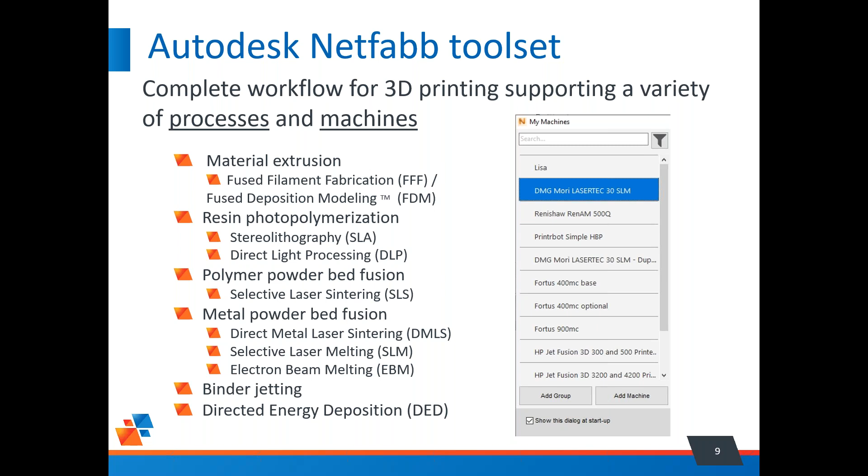Currently, the Netfabb solution is comprised of Standard, Premium, and Ultimate products, one building on top of the other's functionality. On top of that, we have a set of utilities that will help with the process. For example, optimization utility, advanced toolpath utility, lattice topology, as well as a Netfabb simulation utility. And we'll talk about this a little bit later.

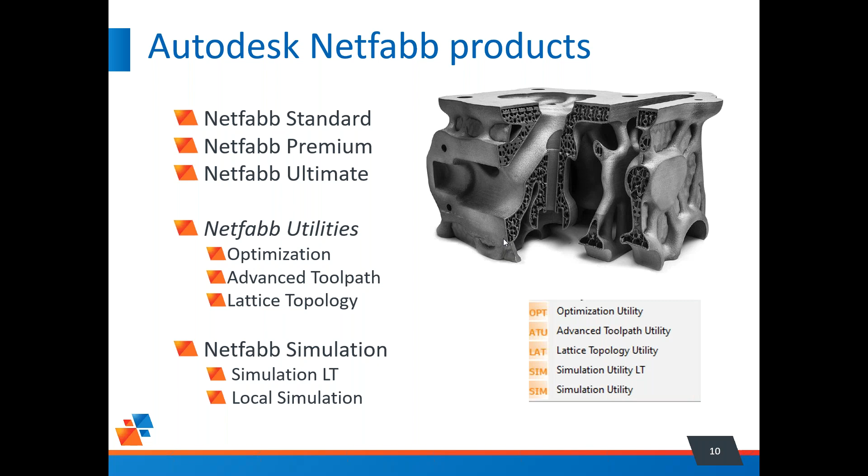So let's take a look at each of these products. Netfabb Standard covers all the important aspects of creating a model, from bringing the geometry in as mesh, 3D CAD or slice files, having the ability to export the mesh back to CAD as BREP, boundary representation type solid,

model editing, for example, part hollowing, tools for mesh manipulation, applying labels, textures, colors, having the ability to cut, split, or shell the model. Slice Commander with toolpath simulation and being able to create hatching patterns and offsets.

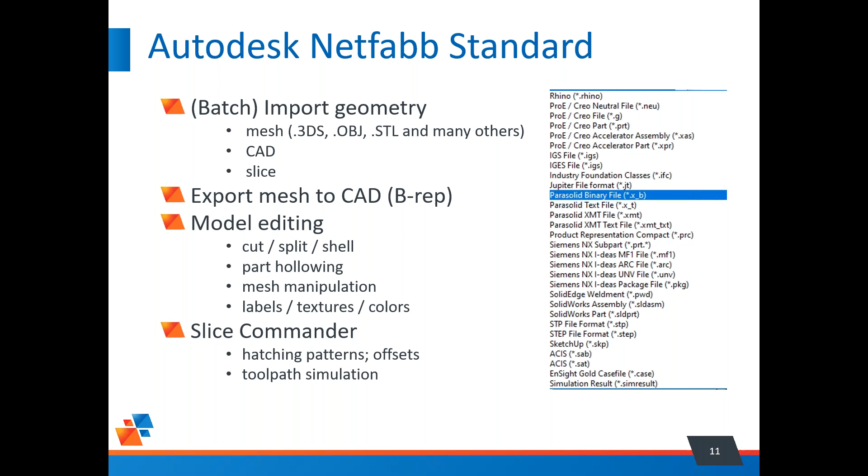Let's take a look at some videos here, courtesy of Kevin Morsfield, technical sales specialist from Autodesk. And first we'll look at mesh to BREP export. So this is the interface of Netfabb. We're bringing in a mesh solid as a 3MF file on a generic platform. We have the ability to orient the model here, and we're going to apply some mesh modifications.

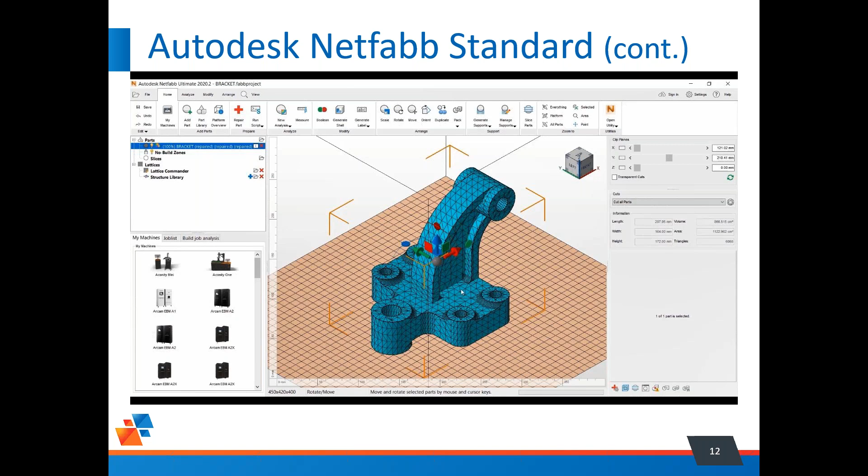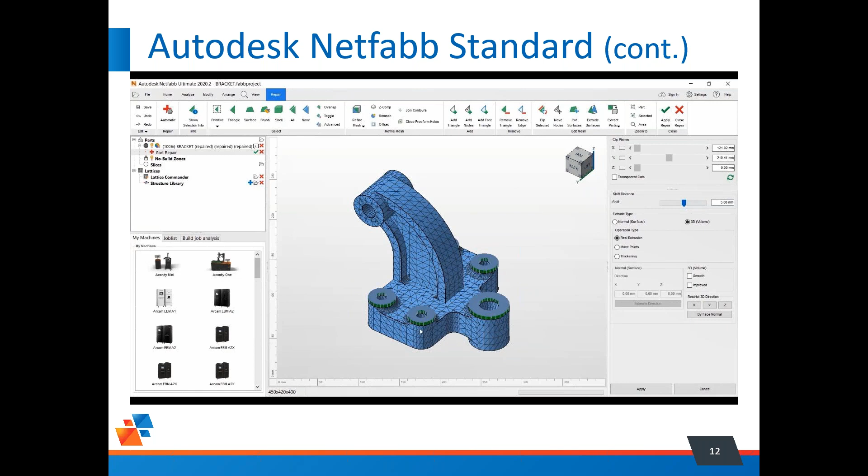For example, we're going to extrude some of these bosses. We're going to look at the repair part first, see if there's any need to fix the model, and we will extrude the selected surfaces at, say, a value of 5 millimeters. The preview is going to show us how the result is going to be. And in the next step, let's delete some of these faces.

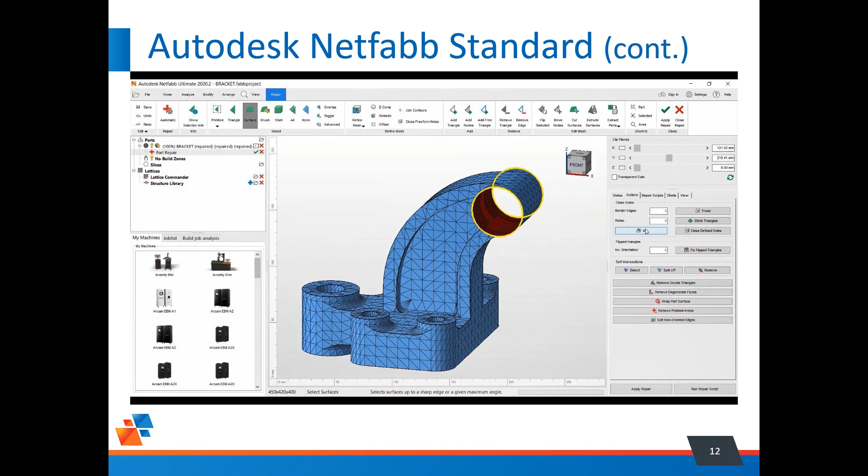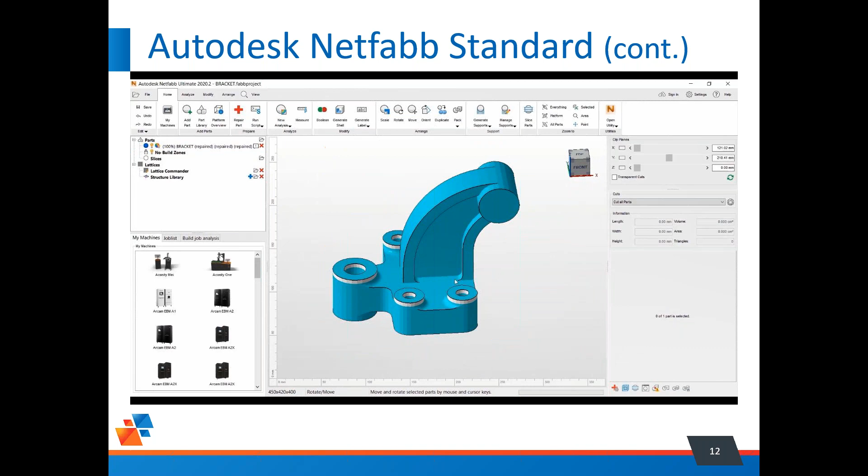We're in a repair environment now. Different options there. Also the ability to cap the mesh model. And the modification could be kept as a separate part, or applied, I mean, remove the original part, or keeping the original as well. And the next step is going to be to export this to solid.

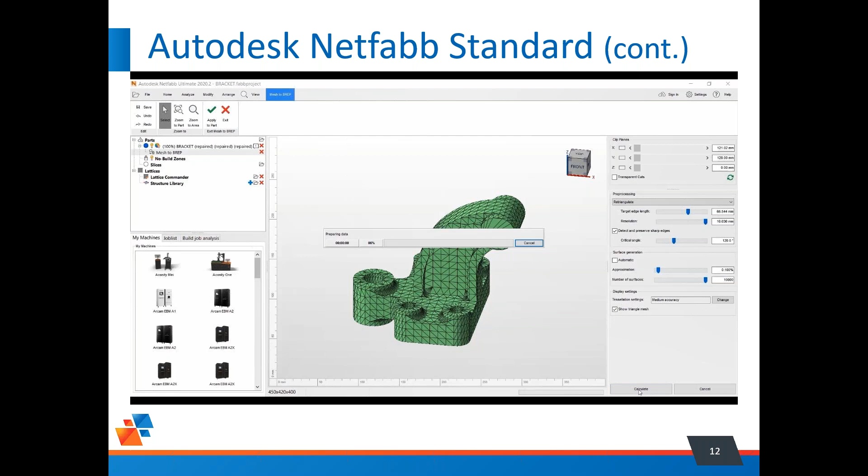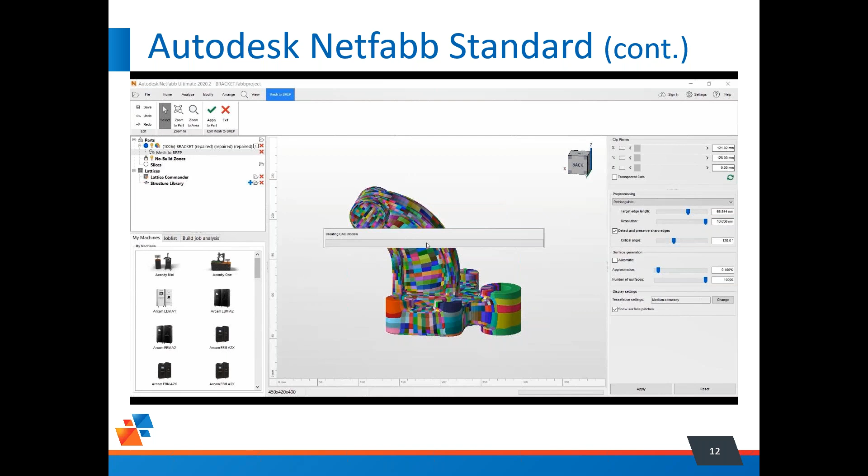That needs to happen after a check on the surface health, looking for normal reversals, or any kind of missing geometry. So we need to make sure that this is a watertight solid. The export could happen maintaining the sharp corners of the part, or applying rounds, especially for components that are a result of a generative design process. And this is the final result. So a model that has been exported, that could be exported to STEP, SAT, or IGS.

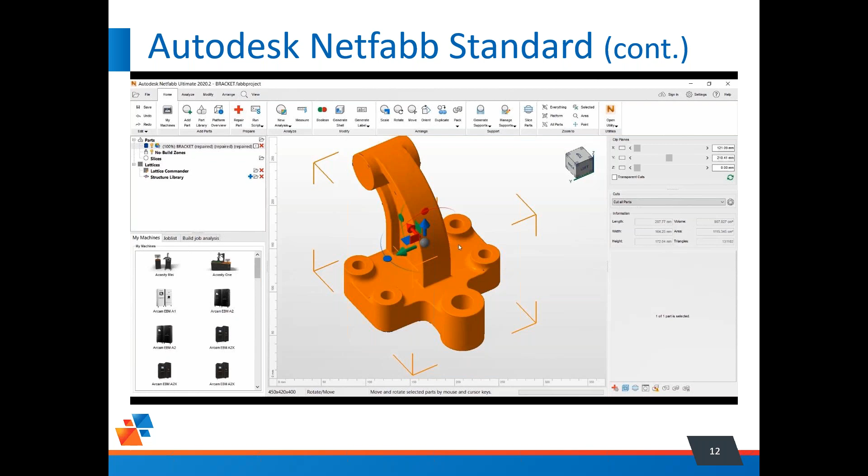Some other functionality in Netfabb Standard: the ability to fix meshes, look for missing triangles, overlapped geometry, by applying some scripts for automatic meshing, a semi-automatic process, or a fully manual process by replacing triangles.

Netfabb Standard also allows a basic 3D packing, like a 3D nesting algorithm, which will take care of collision avoidance, planar packing, ability to move, rotate, or align the parts, orientation analysis. In terms of machine workspaces, it does not support metal type machines, so it's FFF and not metal. Also, the ability to create fused filament type supports at the toolpath level, so inside the G code.

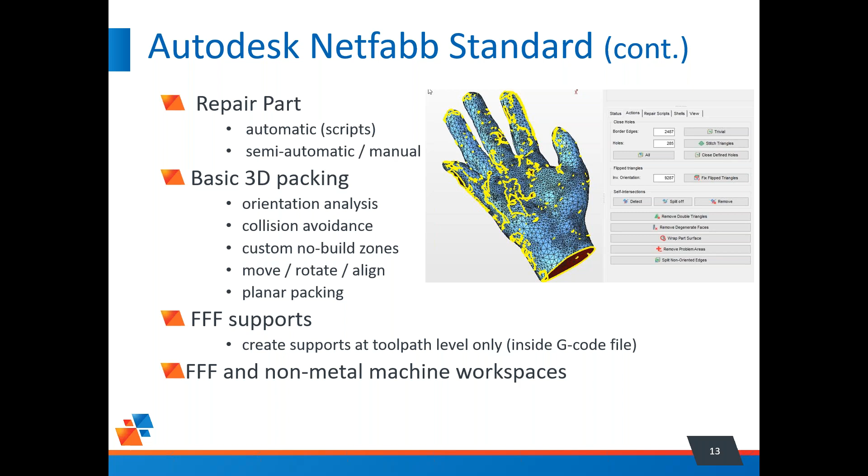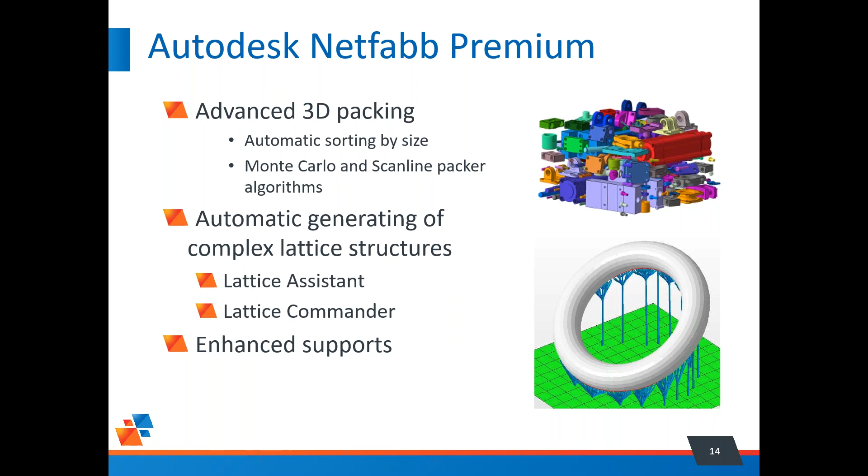The next level, Netfabb Premium, expands on the capabilities of Netfabb Standard, and allows for advanced 3D packing, automatic sorting by size using a couple of highly optimized 3D packing algorithms, Monte Carlo and Scanline. Also, it supports automatic generation of complex lattice structures, and to that extent has a couple of utilities very useful, as well as the ability to create a variety of supports.

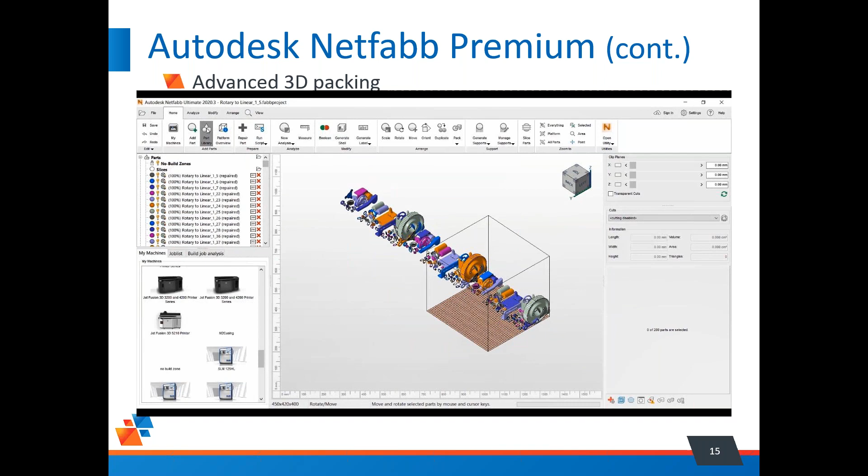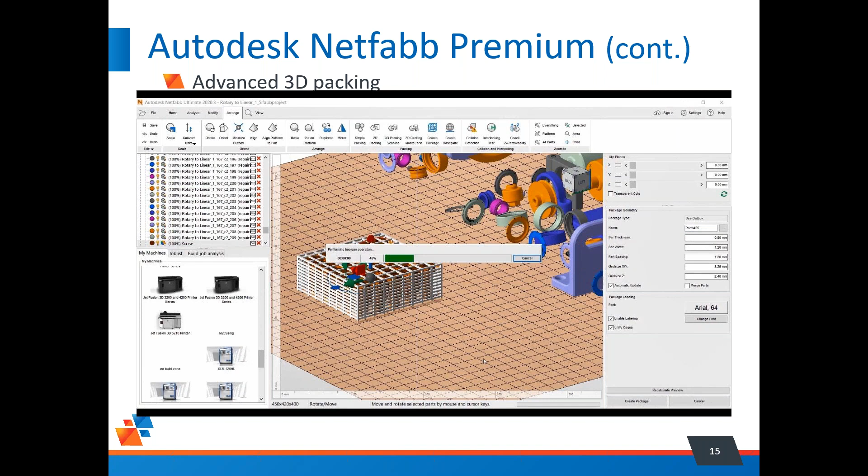Let's take a look at another example here. So you see here in this example on a generic platform, a set of parts of various sizes. We're going to bring in another one, small component, and we want to make sure that all these copies, let's say 25 of them, are not going to be lost in the packing algorithm, thrown in the volume. So we're going to make sure they're kept together. So we're building a package around them, and that allows us to keep these components organized together under that pack.

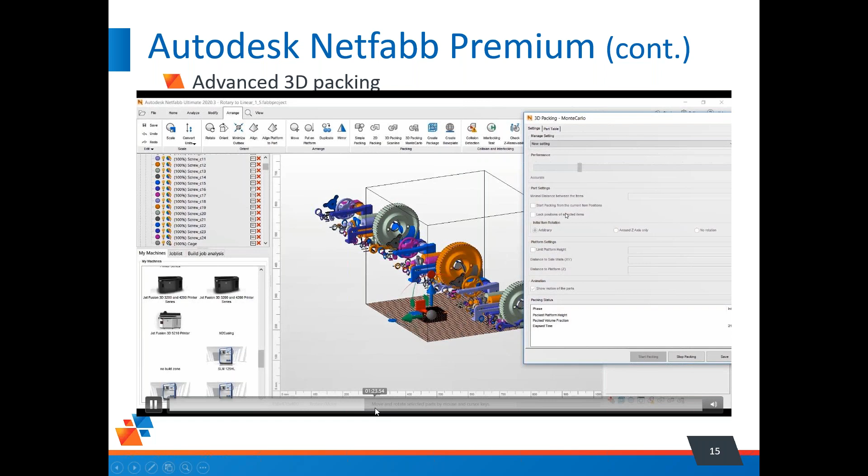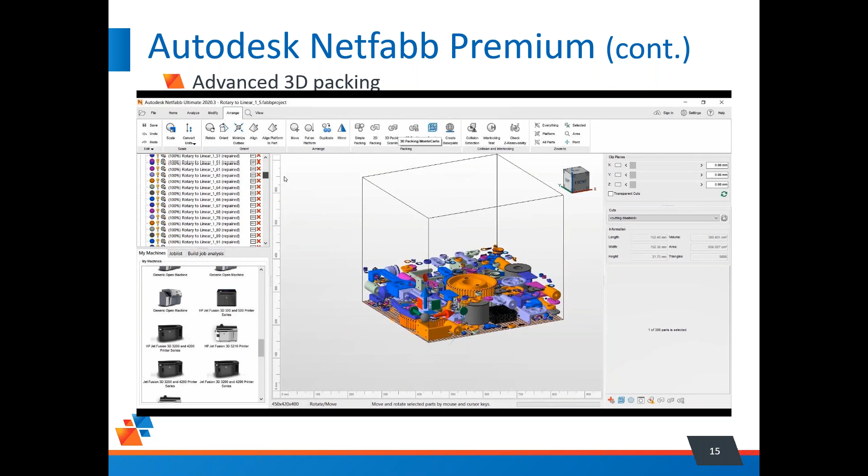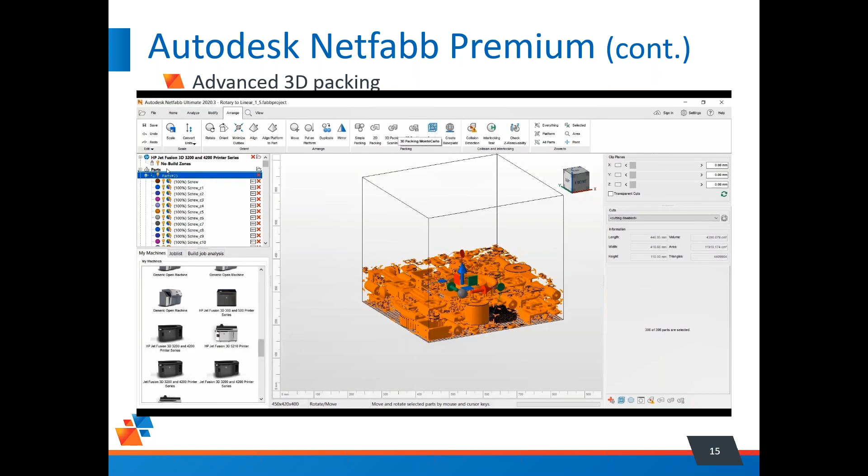The 3D packing Monte Carlo algorithm will, as you'll see in a bit, take care of organization of these to optimize the space. Next step, we're going to take this and place them in a specific machine bed. So I'm going to use, let's say, a HP Jet Fusion 3D printer, and we're going to add these components now to the build zone. And again, make sure that these components are kept together by grouping them.

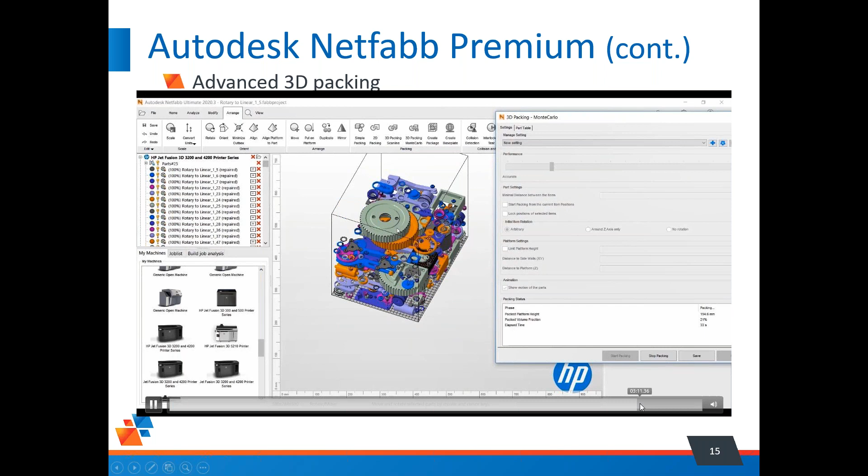And as you will see, after we start the packing process, these components are going to stay under the defined package. There's no interference between components. There's no collision. They are arranged to optimize the volume.

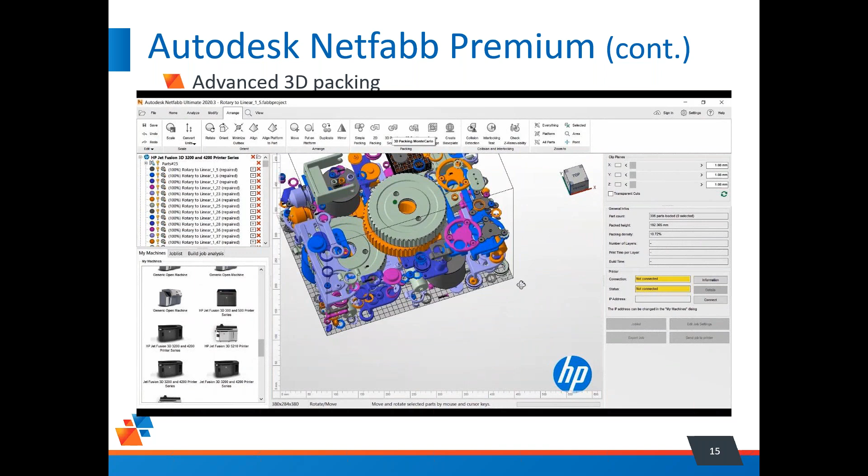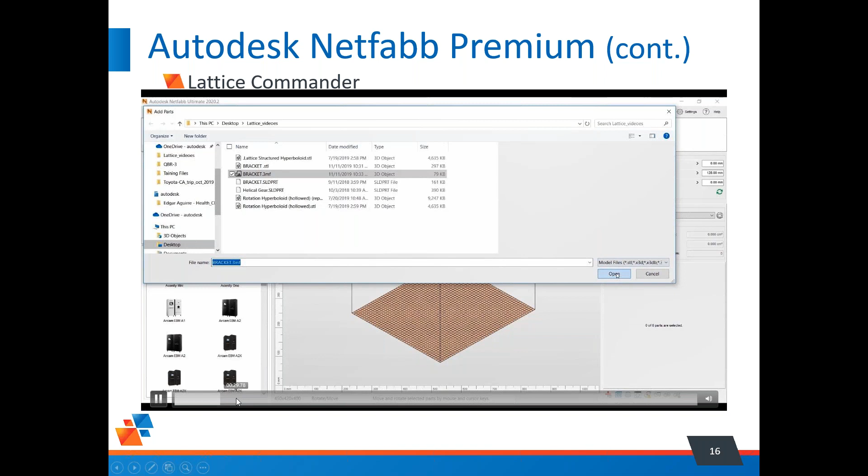Okay. Here's an example of Lattice Commander. So with Lattice Commander, we're again bringing a mesh file in from a large number of formats, and the intention here is to lighten up the part. So we're going to remove some of the geometry, some of the faces, and replace those with an automatically generated lattice. So we've dragged the component into the Lattice Commander here, and we're going to shell this and then remove some of the faces.

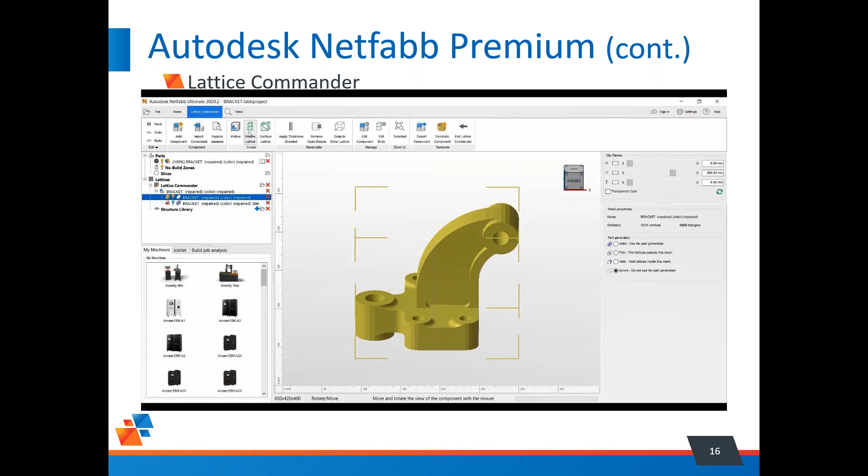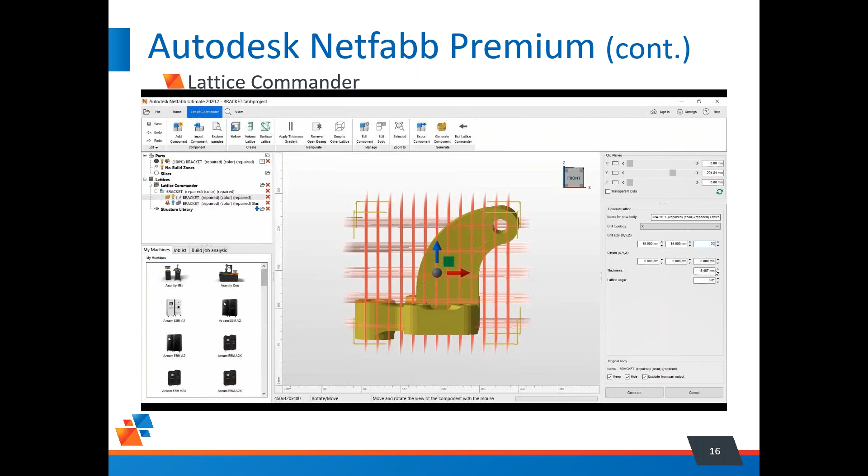Here's a volume lattice command, so we're going to apply an X type topology for this, and these parameters are used to define the lattice size, the three directions, as well as the thickness of the elements. So this lattice is basically matching currently the volume of the part that we started with, and it's a separate component. And the next step is going to be to vary some of these thicknesses.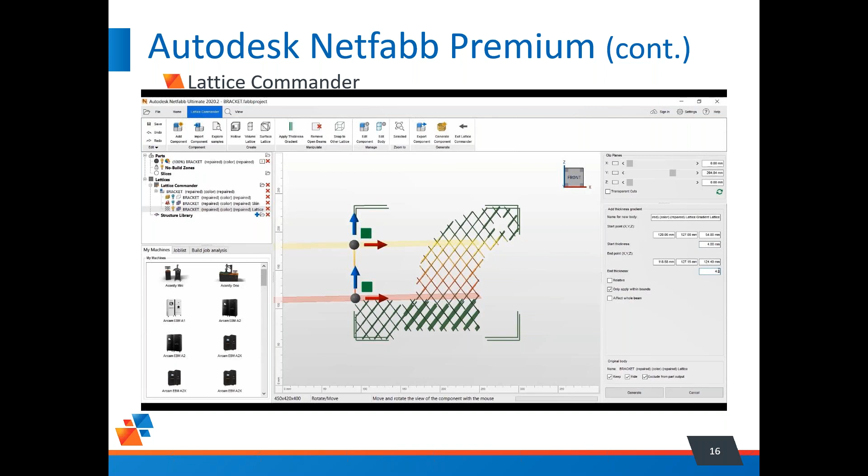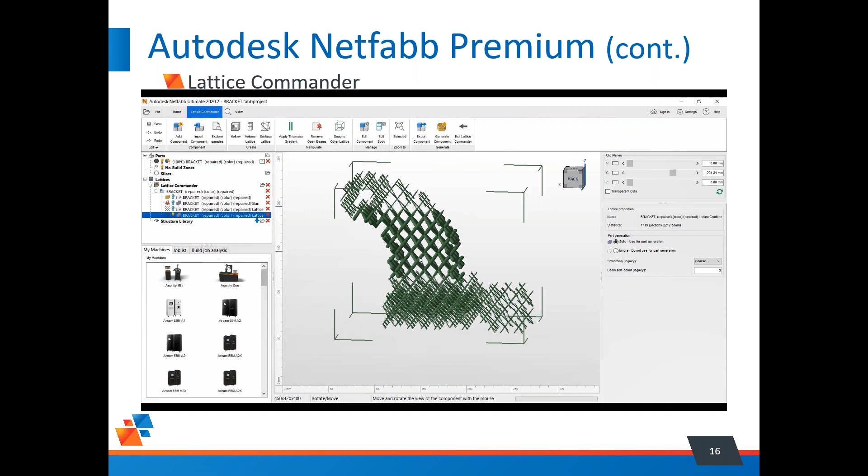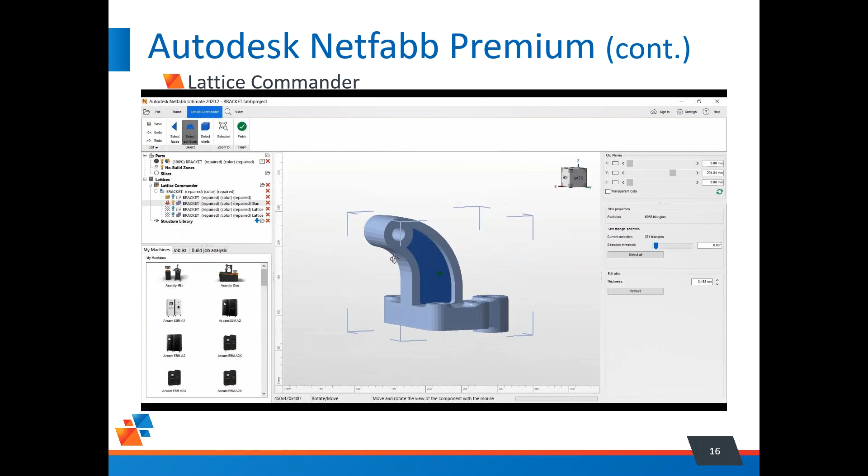So we have the ability of controlling areas where the lattices have a different thickness than the general one. So start thickness and an end thickness, in this case, equal. You can see in between the two defined planes, the model now has a thicker thickness than the 1 millimeter we started with. Now, the next step, we're going to apply an operation that will allow us to basically merge all these together. So removing some of the faces first, thickening some of the remaining faces.

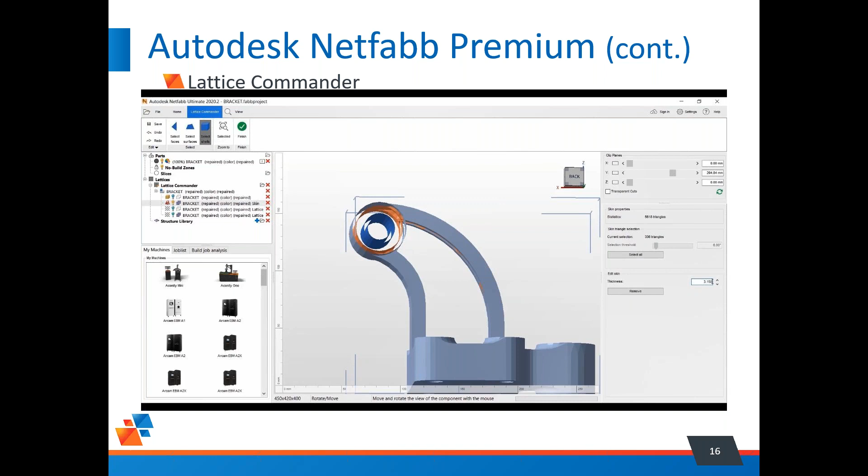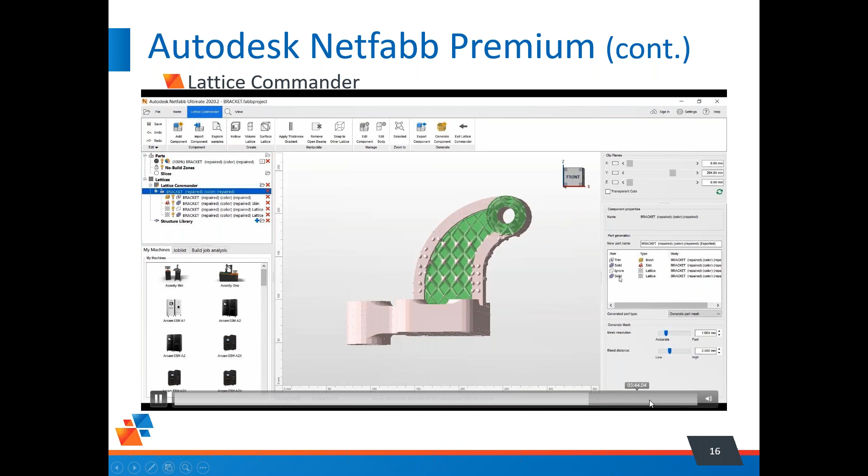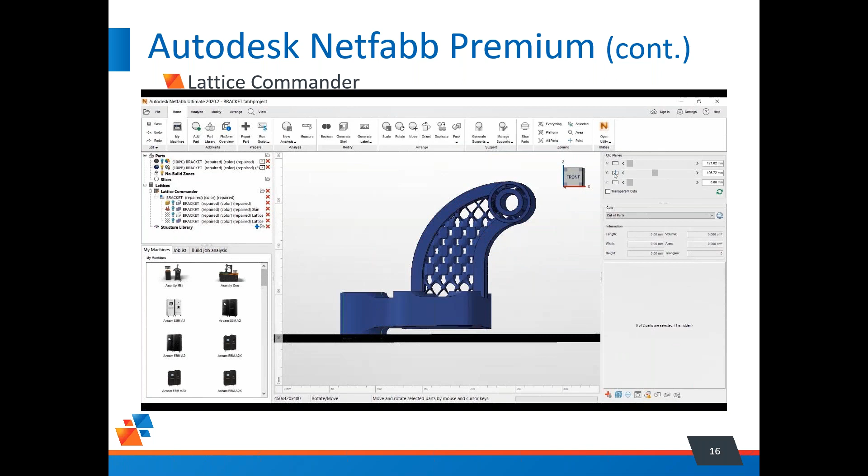The intention here is to apply modifications to the solid that will ensure a certain mass reduction and strength as well. So the result now is going to be basically a Boolean operation between multiple components that will allow us to obtain the final part. And here it is. Some slice planes will show us the geometry change and different lattice thicknesses, different wall thicknesses as well.

Lastly, Netfabb Ultimate, again building on top of Netfabb Premium functionality. There are some extra features there in Lattice Assistant: editable cell size, variable scale for cell size scaling, lattice optimization to withstand prescribed static loads, as well as the selective space structures, 3S. This will allow us to customize lattice patterns and unit cell topologies.

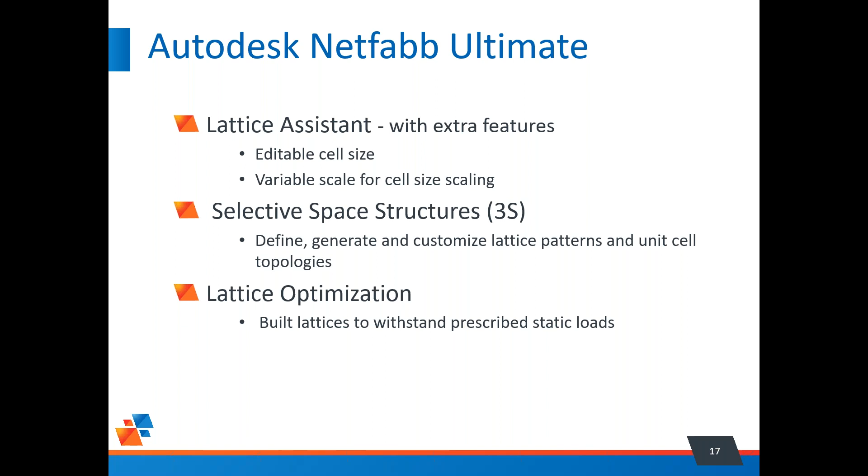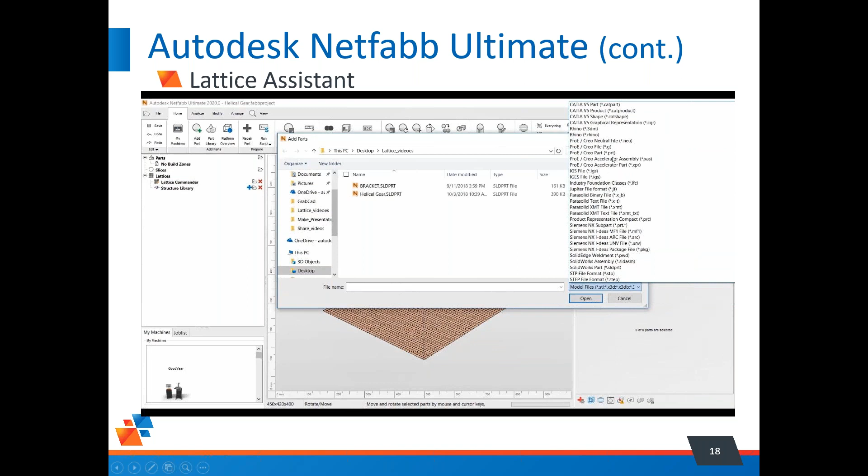Okay, here's the Lattice Assistant. We're again adding a component. This time it's a native SolidWorks file, and the intention here is to reduce the material that we're going to use to build the part by hollowing the interior, replacing the solid interior with a lattice structure. Okay, so this component is a solid component at this point.

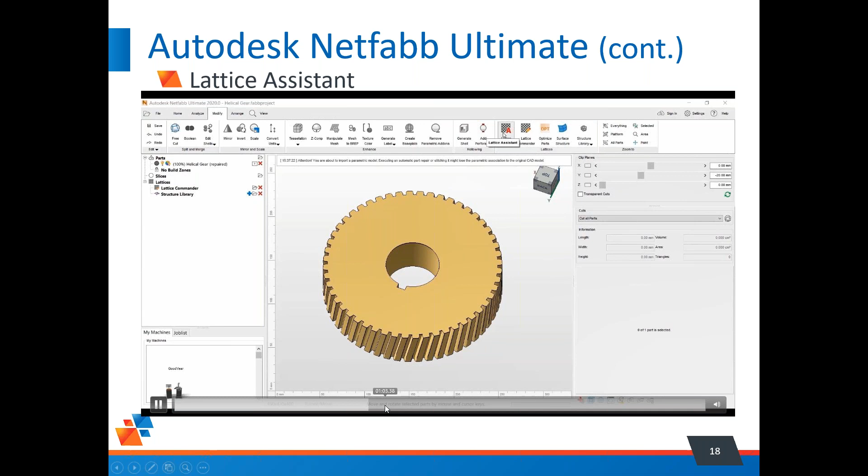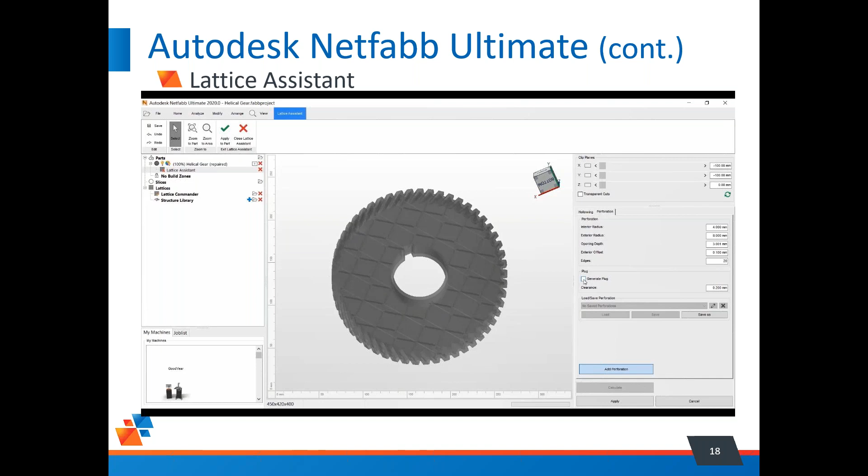And the type of lattice structures available, you can select them from a long list. Also, the thickness can be defined here and the cell size, again, in 3 different directions. And let's see what the result is going to look like after post-processing. We're going to apply some holes to be able to remove the powder.

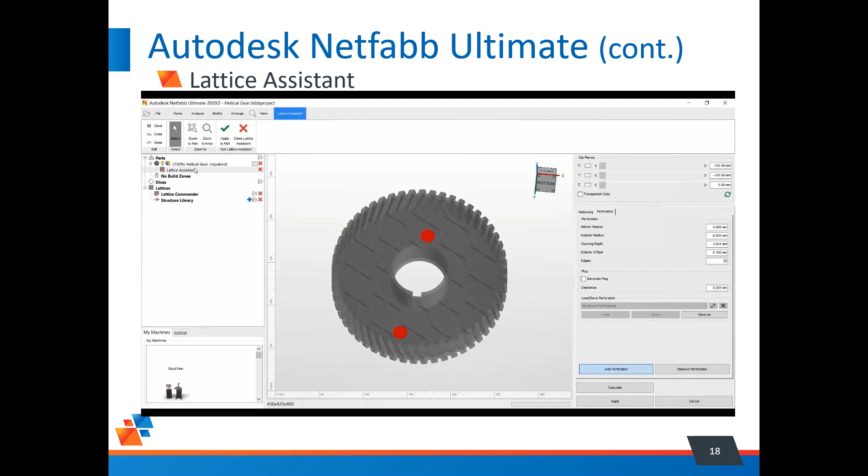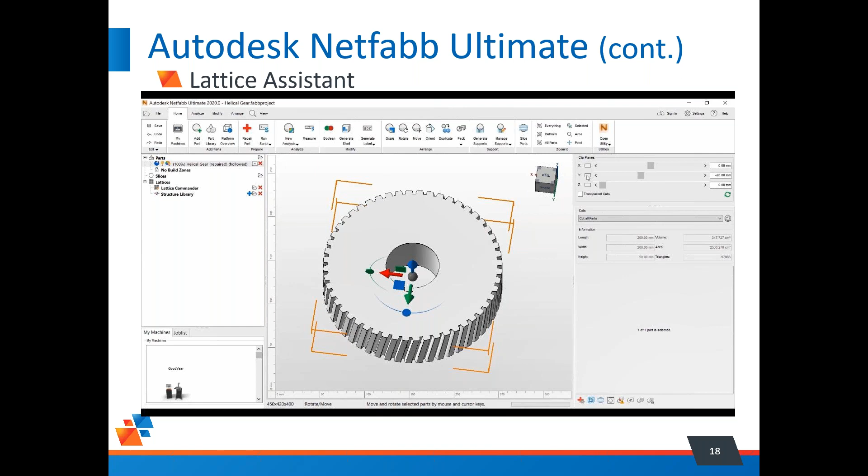The software also has the ability to create plugs as separate components in case you want to actually plug back the solid and glue it back together. You can see the holes being automatically applied there. And a cross-section through the model shows the lattice structure that was generated. Okay.

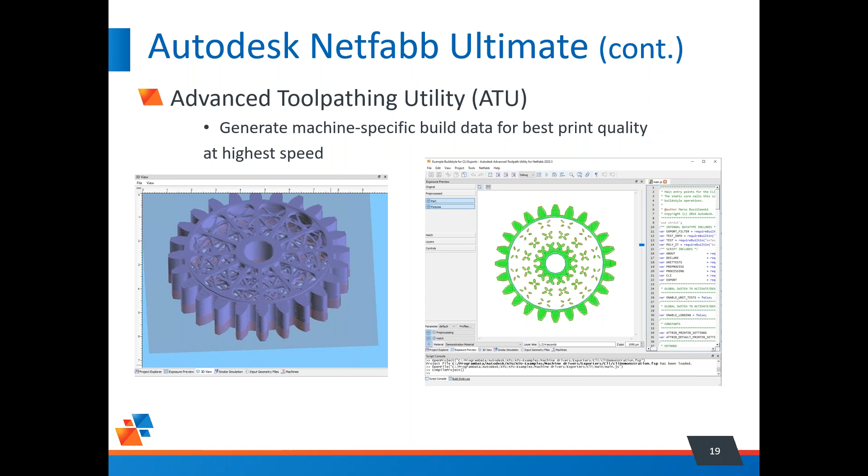Also part of Netfabb Ultimate, there's an advanced toolpathing utility which allows the tool to connect directly with the machines and create machine-specific build files to ensure that the quality of the print is the best possible, and the print is happening at the highest speed. So that's all based on machine properties in, let's say, a post-processor specific to the machine.

Some other capabilities also: scripting with the Lua scripting language to automate common preparation tasks, as well as Netfabb application server. So this will allow us to install Netfabb on multiple computers on a network headless, so without an interface, again, to speed up the processes.

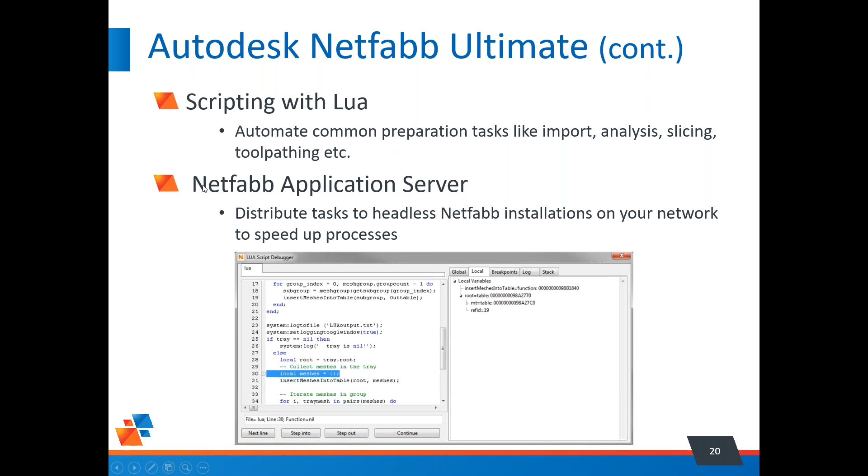Lastly, let's talk a little bit about Netfabb Simulation. So these builds, especially on the metal side, are particularly expensive. So the intention here is to make sure that we avoid build failures. And in order to do this, we are going to use this weakly coupled thermo-mechanical model that will allow us to predict residual stresses and excessive distortions.

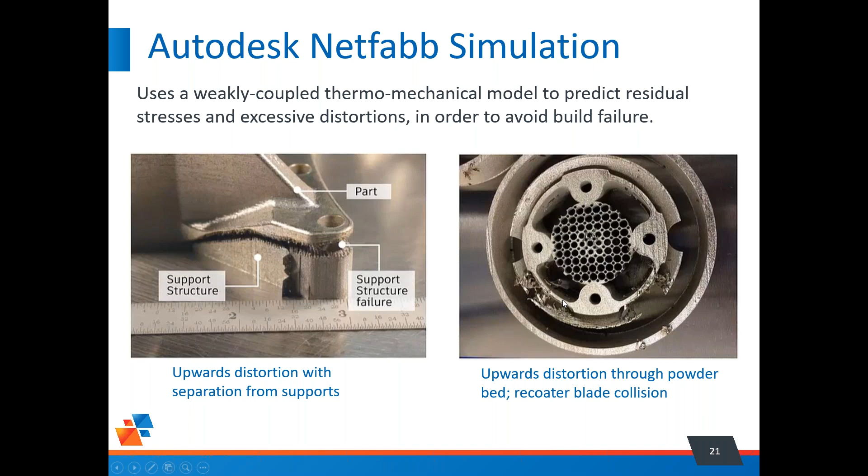On the example on the left side, you see there the part distorted upwards and separated itself from the support structure. So you see a break zone example. On the right side, again, the part distorted upwards and passed through the powder bed level. The recoater blade hit the part at that point and broke it. So these are the kind of things that we mainly want to avoid.

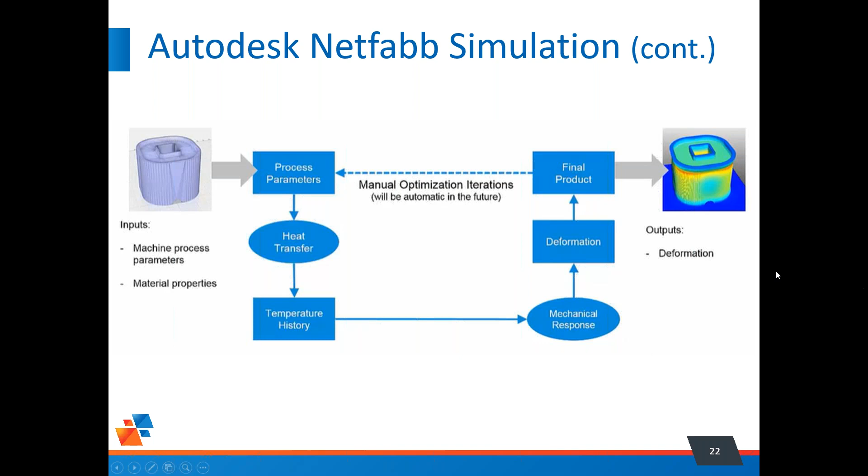Netfabb Simulation as a workflow is basically combining a thermal and a mechanical analysis. So we have as inputs material properties and machine process parameters. The heat transfer analysis gives us a temperature history, and that allows us to find the deformation in the structural analysis and get the final product, the output being the deformation, the displacement. As simulations are typically iterative processes, there is currently a manual optimization iteration that needs to happen.

So what we're doing here is capturing the material properties and the process properties into a so-called PRM file, a process parameter model file. And this is using something called multi-scale modeling. So basically a really small model on the left side, whose properties in terms of a moving heat source can now be applied to a 3D CAD model that you see on the right side. So going from a small size to a part-scale geometric model.

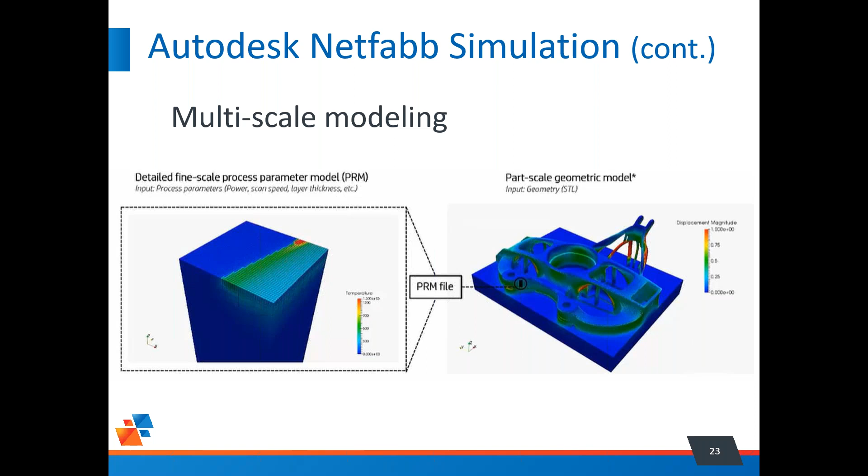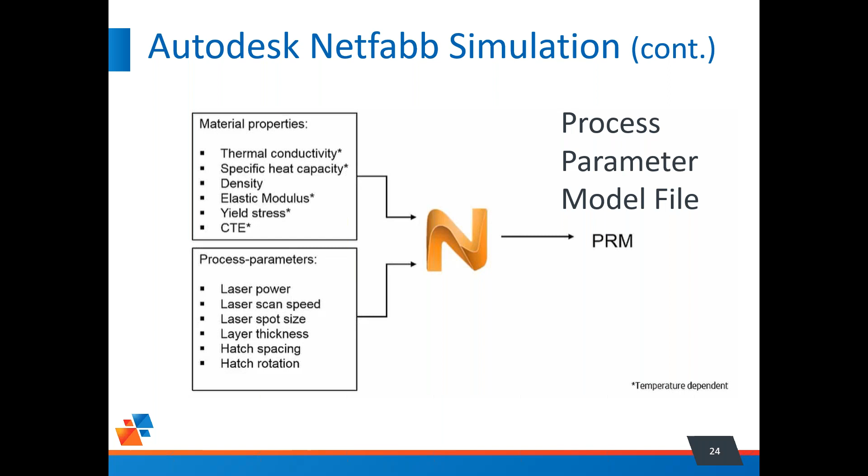So this PRM file will allow us to store material properties like thermal conductivity, specific heat capacity, elastic modulus, yield stress, coefficient of thermal expansion, all these being temperature-dependent measures, as well as density, as well as process parameters. So laser power, scan speed, spot size, layer thickness, hatch spacing, and rotation. They are all part of this process parameter file.

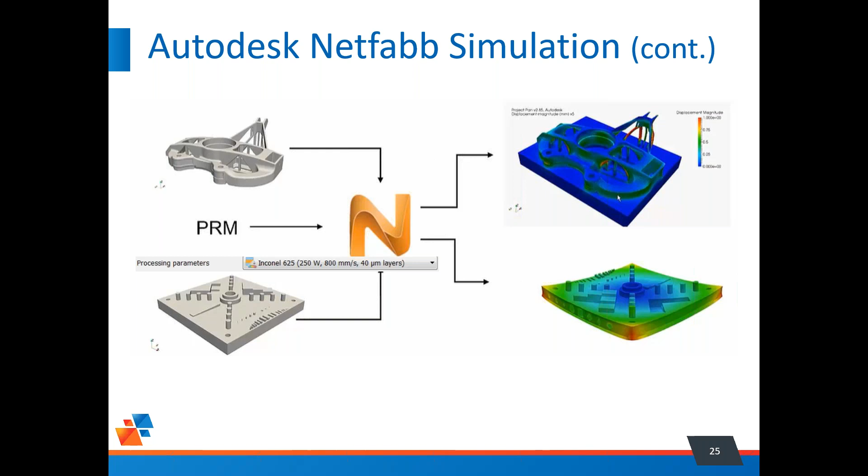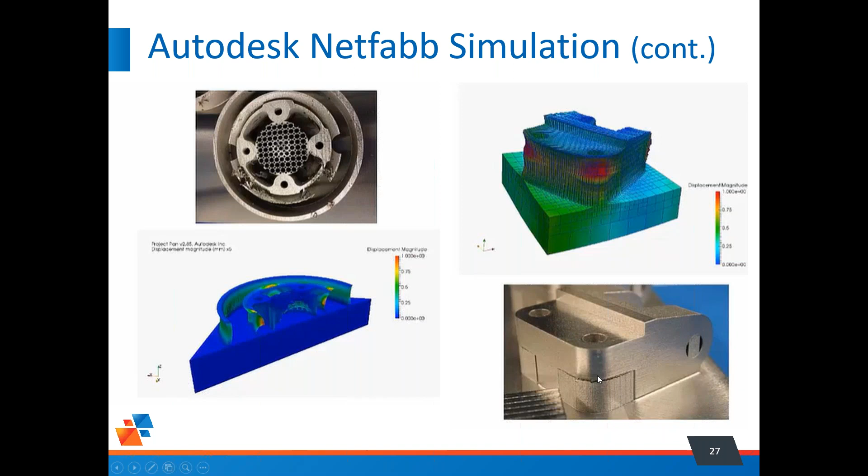By having this process parameter file, we can now extrapolate this to various CAD models, and you can see results of some simulation on this type of parts. Here's a screenshot of the out-of-the-box Netfabb PRM files. Various alloys, Inconel, titanium alloy, and so on. And here are some examples of the simulations based on the problems described. So you can see the area here where the recoater blade would hit the component, as well as the area on the right side where the stresses are too high and the support separates from the model.

A few other applications of the Netfabb simulation utility: the ability to determine hotspots and areas that suffer from a lack of fusion, consequently weaker; being able to simulate an annealing process, a stress relief treatment; being able to predict the residual stresses after wire EDM removal of the component from the build plate; and being able to use distortion prediction to create and export a compensated shape.

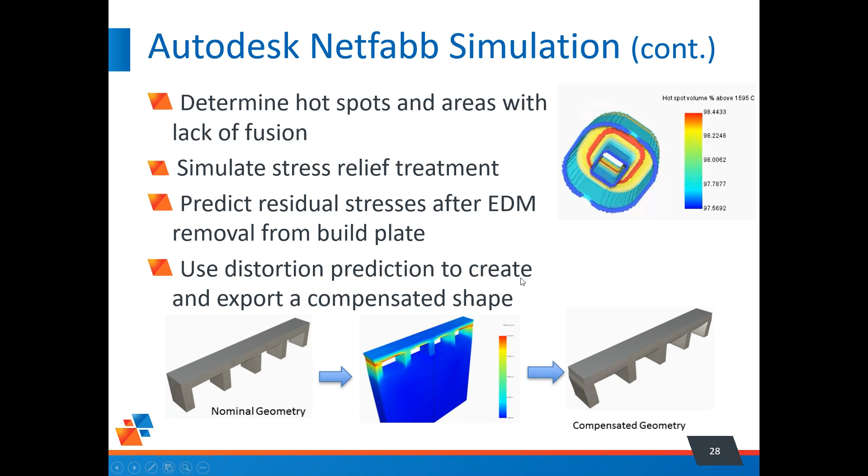In terms of packaging, Netfabb Simulation comes in basically two products: Simulation LT, which is included in Netfabb Ultimate, and there are some limitations here. 500,000 nodes for the size of the model, 20 layers grouped maximum, and in order to reduce the amount of memory and the processing time required, there's a process of coarsening the mesh, for example in the build area, and there's a maximum of 2 mesh coarsening generations there. Also, there's no moving source. This is part-level powder bed fusion only.

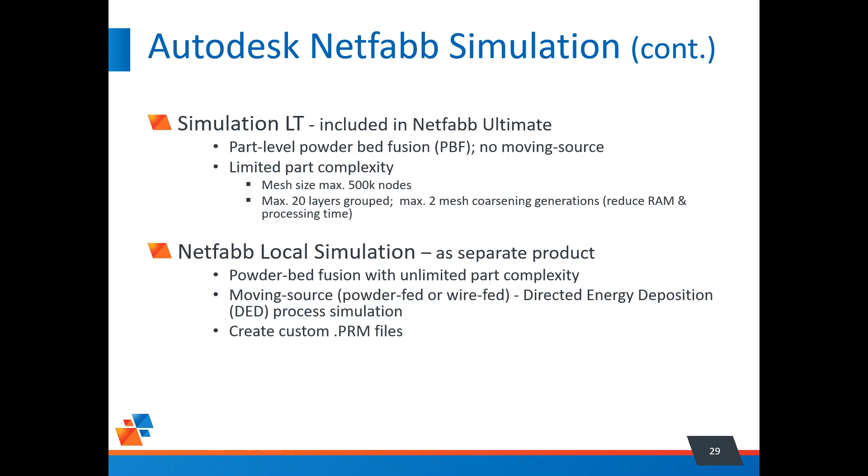As a separate product, installing Netfabb Local Simulation, these limitations are removed, and this allows us to also simulate a directed energy deposition process and create custom PRM files.